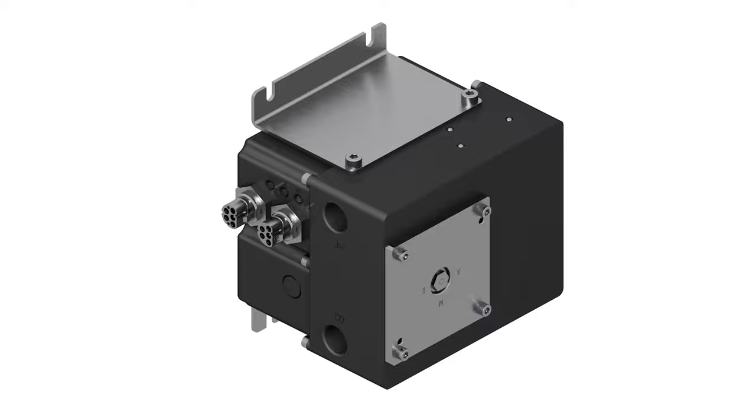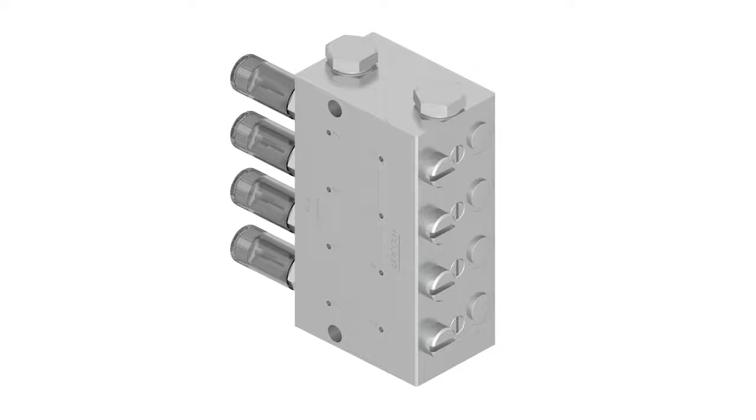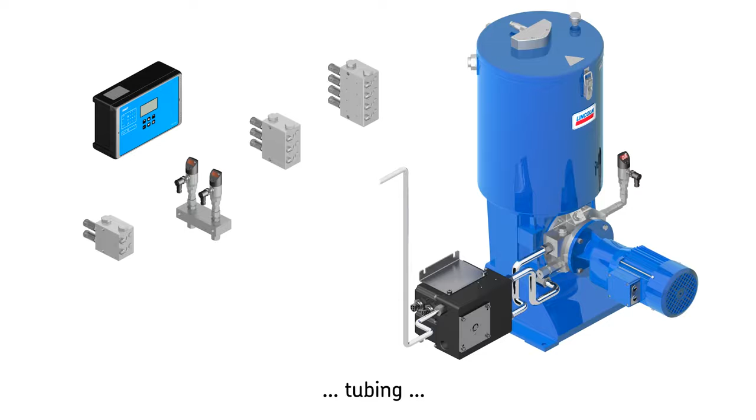SKF dual line automatic lubrication systems consist of the following components: a pump unit that includes an analog or digital pressure gauge, such as the electrically operated ZPU24 or similar product; a changeover valve, such as the EMU3; several dual-line metering devices that include piston sensors similar to the VSG; end-of-line pressure sensors like EDW or similar products; a control unit similar to the LMC301; tubing; and fittings. These flexible systems are simple to design and can be reduced easily by removing metering devices, or extended by installing additional metering devices.

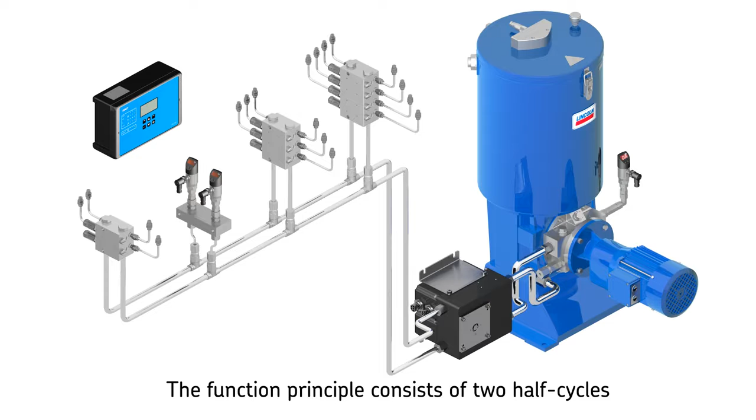The function principle of the dual line system consists of two half cycles. In the first half cycle, the lubricant is pumped into main line A. The second main line, B, is connected to the relief line. The lubricant, which is conducted by the changeover valve, is supplied to the metering devices. The metering device pistons are moved into their adjusted end positions, thus dispensing an exact metered quantity of grease.

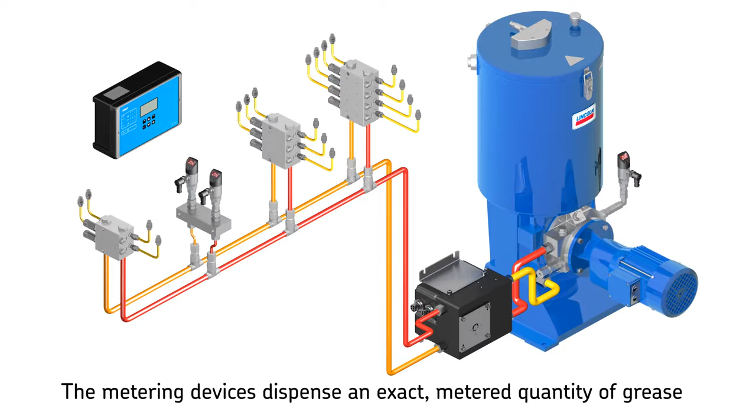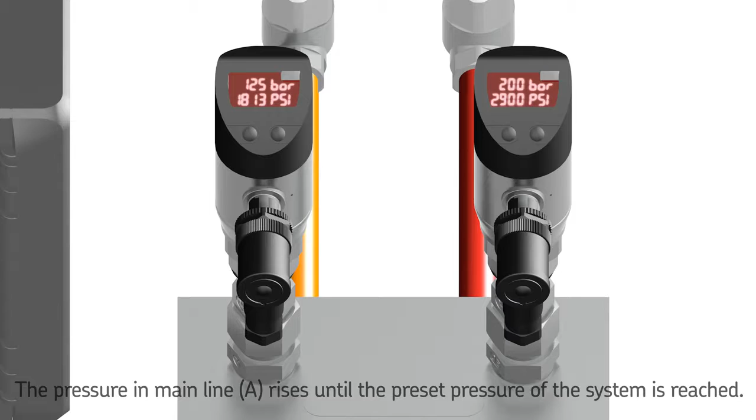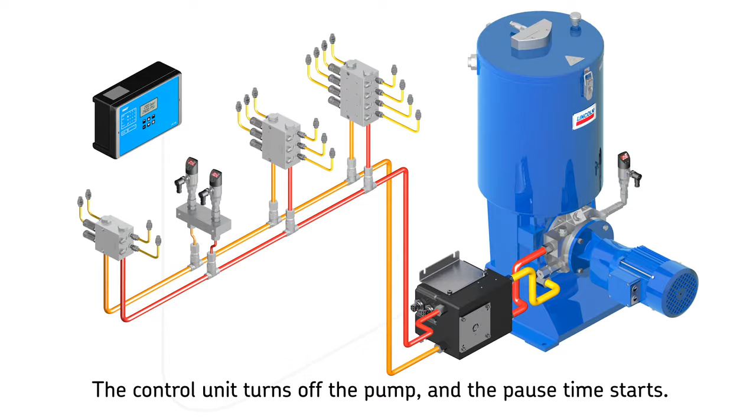Once all metering devices have dispensed their lubricant to the consumption point, the system is hydraulically closed, which causes the pressure in main line A to rise until the preset pressure at the end-of-line pressure switch is reached. This switch is mounted in the main line prior to the last metering device. The pressure switch then signals an electric pulse to the control unit, which turns the pump off and signals the changeover valve to relieve main lines A and B, and the pause time starts. At this stage, half of the lubrication points in the system have been lubricated.

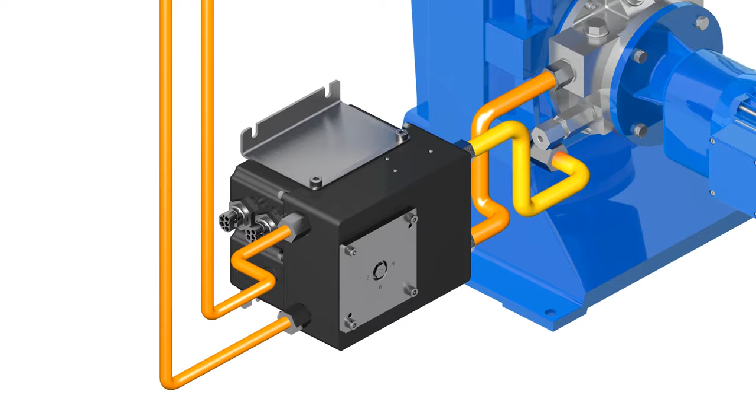System pressure relief works in such a way that the pressure line between the pump and changeover valve first gets relieved into one main line. Then, both main lines become relieved at the same time. In the second half cycle, main line B is pressurized, and the second half of the system lubrication points gets lubricated. Afterwards, the cycle continues as before.

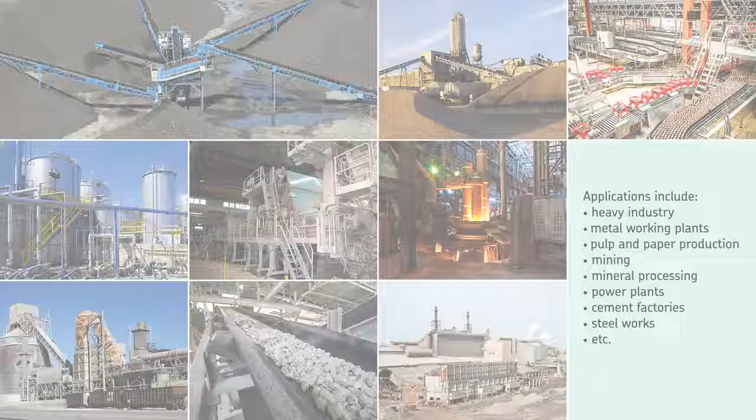SKF dual line lubrication systems are suitable for a variety of applications, including heavy industry, metalworking plants, pulp and paper production, mining, mineral processing, power plants, cement factories, steelworks, and more. Our reliable systems operate effectively in harsh conditions associated with these industries, including potentially high lubrication point back pressure, dirty, wet or humid environments, and low temperatures.

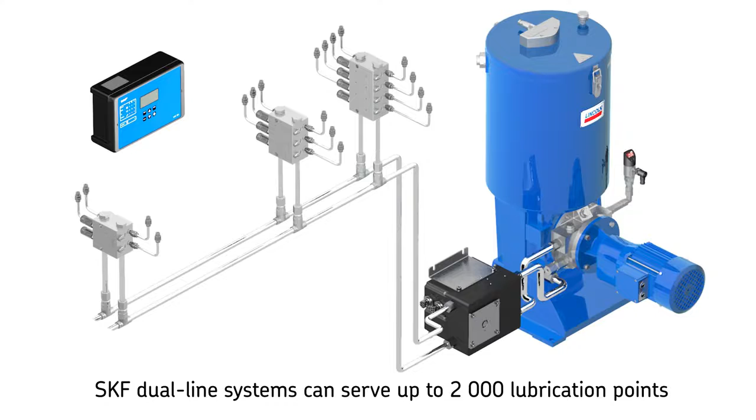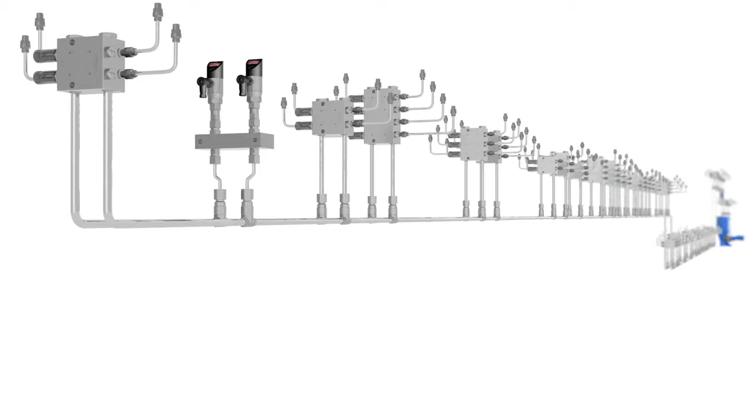SKF offers dual-line systems that can dispense a precise metered amount of lubricant to up to 2,000 lubrication points over long distances up to 120 meters, 131 yards, and more, depending on case values. SKF dual-line systems feature smart electronic components which allow the system to do self-learning for optimized and reliable system performance.